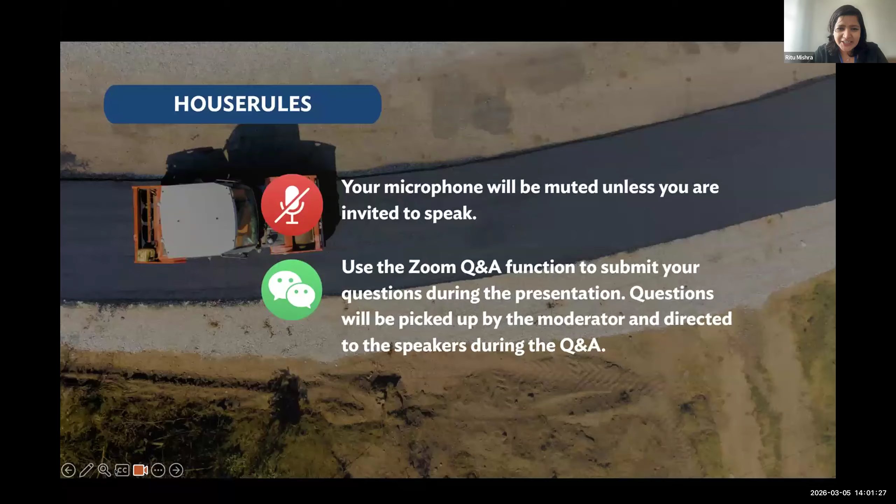But today we turn our attention to a topic with wide relevance across many contexts, which is making low-cost granular roads more resilient. Low-cost granular roads form the backbone of many rural road networks across Asia and the Pacific, and in fact they account for about 35% of roads globally. However, these roads are often very vulnerable to heavy rainfall, flooding, and poor material performance, which can lead to problems such as deformation, erosion, and even washouts.

So in today's Green Roads webinar series, we will be exploring practical lessons from Australia, including mechanical and chemical stabilization techniques, the use of recycled materials, and emerging permeable pavement concepts that can help improve the resilience of these roads. So please stay with us until the end of this session, and we look at more practical and cost-effective solutions for building longer-lasting climate-resilient road networks.

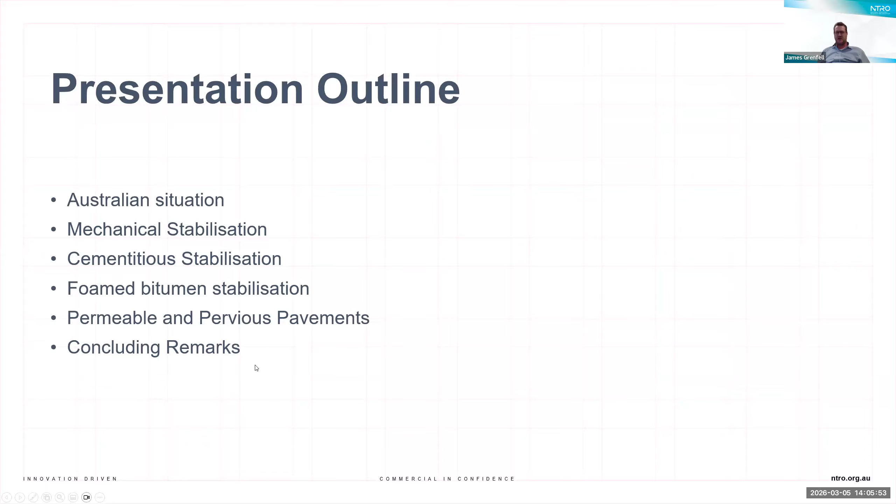Right, so to start off with, I'm going to talk a bit about the Australian situation. I don't know how well everybody knows Australia. Just to put it in, I guess, sized perspective, the land mass of Australia is around 90% of mainland USA, or the main part of USA, not including Alaska.

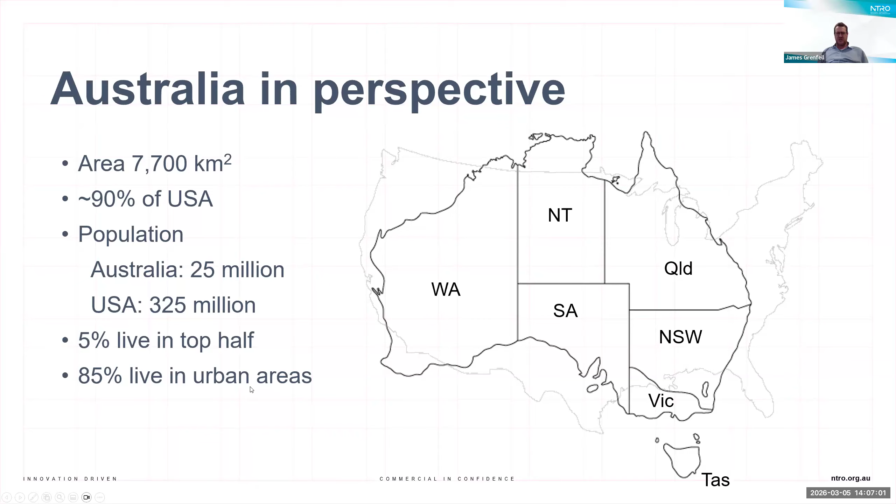Whereas here we've got a population of just over 25 million compared to, say, the USA with 325 million people. There's a big disparity in Australia between where people live. Only 5% of the population lives in the top half of the country, and around 85% of the population live in urban areas. So there's a large amount of land mass with very few people living in it, which presents a lot of issues in terms of building and managing a road network.

Most of the population is around the eastern seaboard. Brisbane, Sydney, Canberra, Melbourne, Adelaide are all roughly around the eastern or southeastern seaboard, and that's where most of the population is. Large proportions of the centre of Australia have either no road network or nobody living in them.

Putting things into context with the USA - and that's not necessarily very helpful for everybody in this session, but I think most people have a bit of an appreciation for what the USA is like - the road network in Australia is around about 810,000 kilometers these days, which is quite small in comparison to the USA.

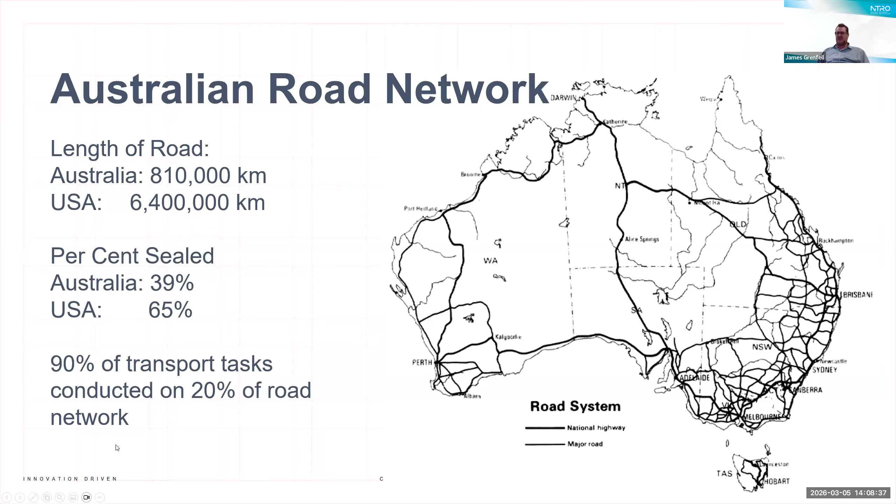The other thing is that we have a relatively small amount of the network that's actually sealed pavement. I think around 90% of the pavements in Australia are granular pavements, either with or without sprayed seal. So only around 10% of the network is full depth bound pavements, be that asphalt or concrete. The other interesting thing is around 90% of the transport tasks are undertaken on only 20% of the network, so big disparities in terms of traffic levels as well.

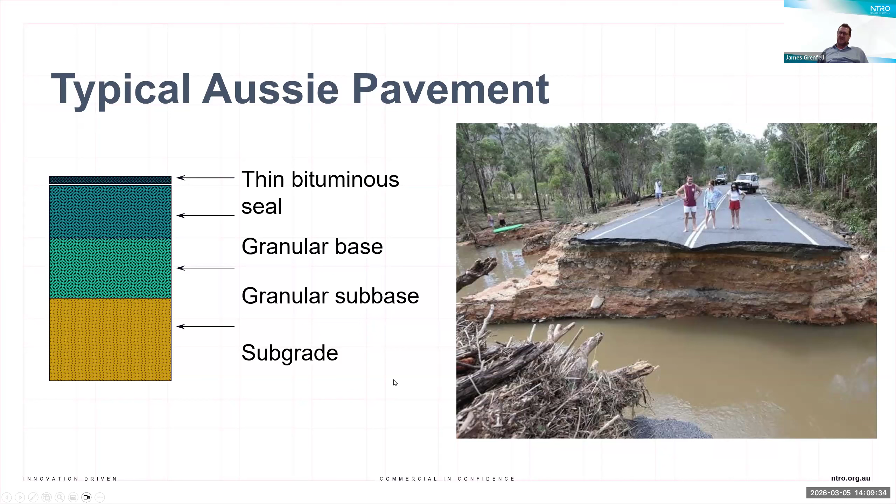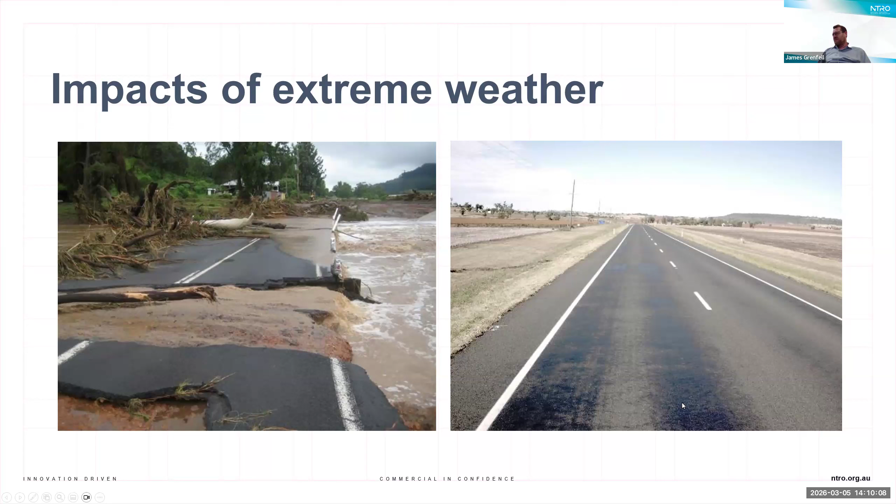So these are some of the issues that we're facing in Australia, obviously dealing a lot with instances of very heavy rainfall, flooding events, but also Australia is a very hot country. We're subjected to extreme high temperatures, and again, that is particularly troubling for the sprayed seal network in terms of heating up binder, causing binder softening, flushing of binders, and reduction in the quality of the sprayed seal road network.

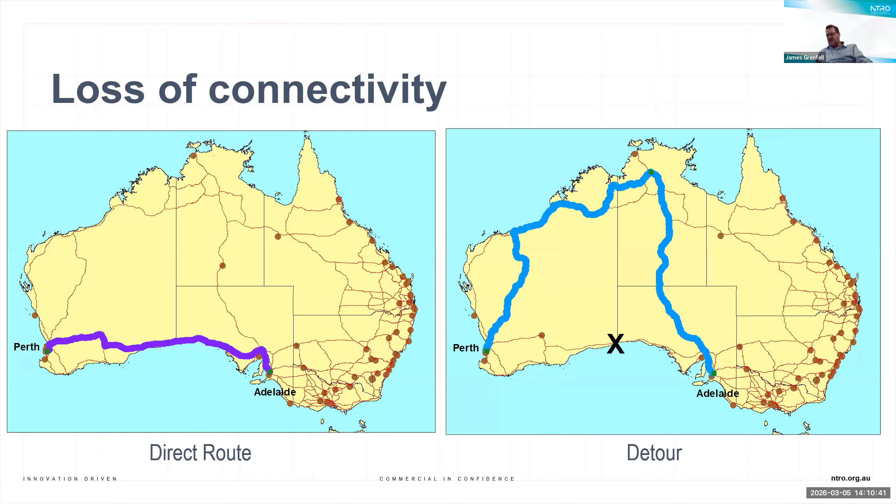As mentioned before, certain parts of the country have very little connectivity. For example, there's only one major route between Adelaide and Perth. If we're to lose that direct route, you can now see that you have to drive all the way up to almost Darwin in the Northern Territory, across the top of WA, and all the way down through WA to get to Perth. So we're very precariously balanced in terms of the risks of losing connectivity and what that means to our road network.

We're affected by weather cycles, and in Australia we go through this continual cycle between El Niño and La Niña, where we have much drier, hotter periods and much wetter periods that we obviously have to deal with in our network. These weather periods typically last somewhere in the region of 5 to 10 years, where we'll have 5 or 10 years of very dry period, followed by 5 or 10 years of very wet period.

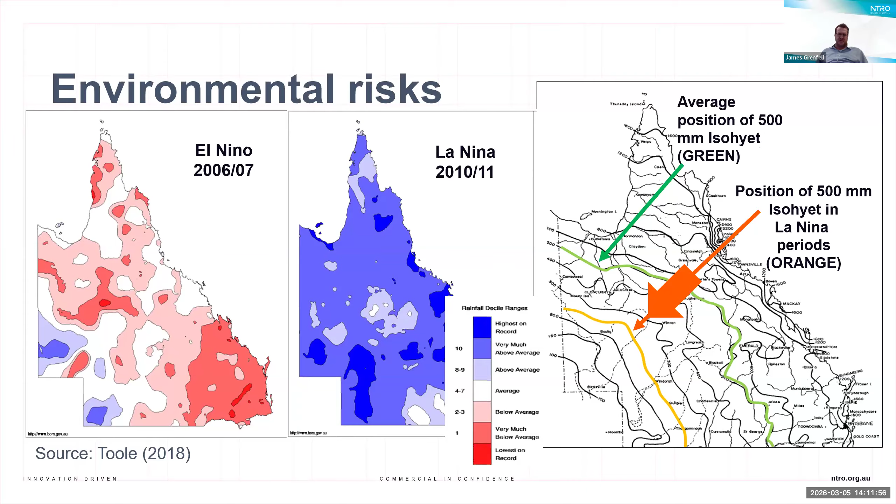And obviously that's going to have significant effects on the road network and the operation of the road network. The higher temperatures affect bituminous surfacings, asphalt, etc., while very wet conditions really affect the unbound granular materials below, and especially the unsealed road network.

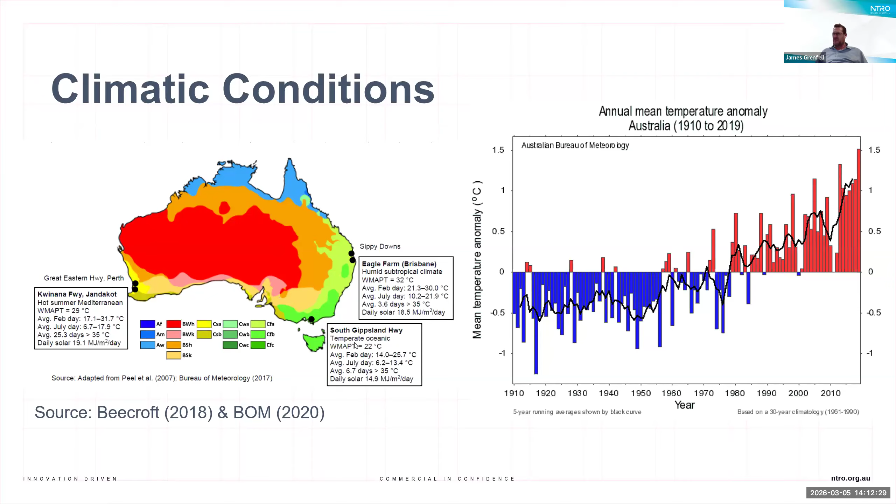Again, generally Australia is very hot, and mean temperatures are only obviously rising over time, significantly higher in the last 30 or 40 years, where average temperatures are continuing to go up, and understanding how to manage a network under those conditions is obviously a continuing problem.

The first main topic area I'm going to talk about is mechanical stabilization, or essentially how we can get the best out of our granular materials. Some of this has come off the back of a number of guidance documents that we've produced over the years, one of them being a course that we've run for probably the last 30, 40 years, which is the Best Practice Guide to Unsealed Road Network.

As I mentioned, there's probably still 50 to 60% of the Australian road network that is unsealed granular pavement. So it has no sprayed seal, no asphalt surfacing, nothing protecting the granular network.

The granular materials can be very susceptible to changes in climate conditions. In very dry conditions, they become dusty and could be subject to loss of material, or depending on the materials in question, may be subject to corrugations. But if we get very wet conditions, we can have issues with potholing and rutting. The unbound granular materials can become quite unstable under changes in moisture conditions. So these are some of the problems we have to deal with on the unsealed road network.

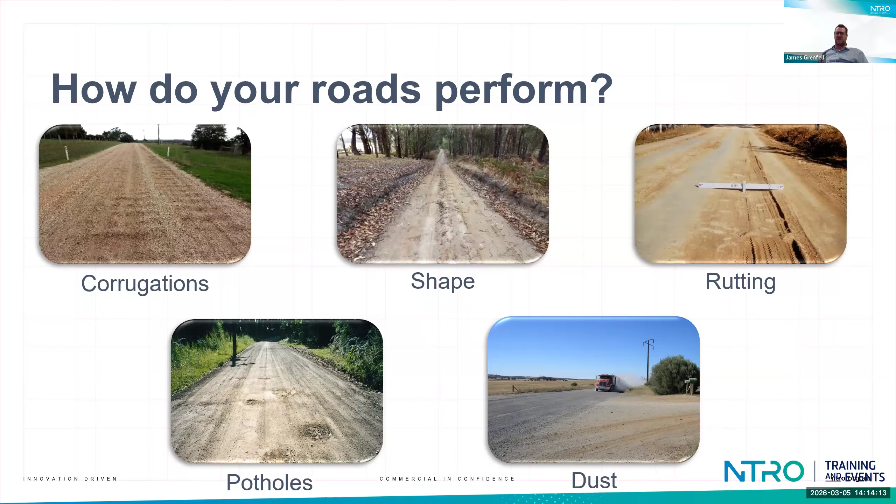I'm not going to go through and tell everybody about unsealed roads or how to manage them, but this document, the Unsealed Roads Best Practice Guide, is free to download through the NTRO website. It contains a lot of information to support people in terms of asset management, design, construction, and operations, and is supported by a number of appendices.

Some of the things I'm going to be talking about is understanding how we can get the best performance out of the unbound granular road network. I don't know how much people love graphs. Hopefully most of us are engineers, and we like to see plenty of graphs in the afternoon, especially after lunch.

This is a relatively simple particle size distribution graph showing the typical types of materials we might be using in our unbound road network. We've got particle size on the x-axis, percentage passing on the y-axis, and we can analyze the materials we're using on our road network by sieving them through a series of ever-decreasing sieve sizes to build up an indication of the gradation of the materials we're dealing with.

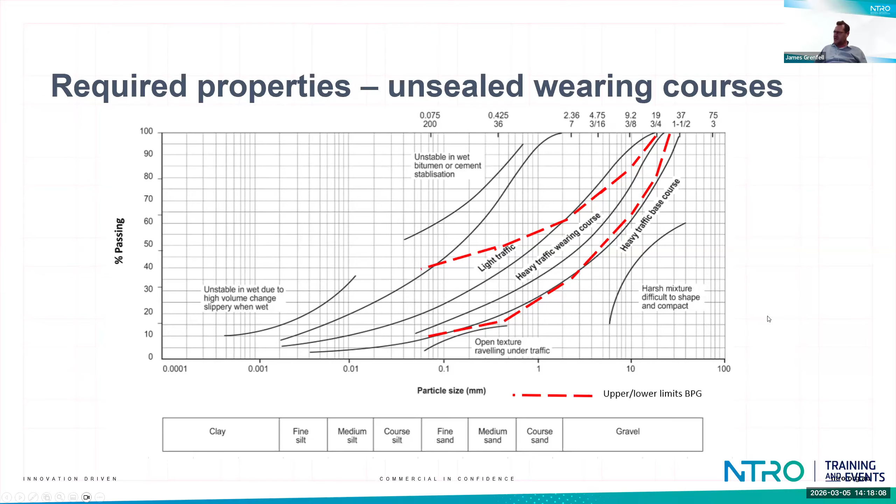Let me introduce you to another exciting graph. This graph, or this system, was developed in South Africa, and it's essentially giving us an indication of how granular materials might perform on unsealed road networks when used in wearing course applications. This time we have a graph with grading coefficient on the x-axis and shrinkage product on the y-axis.

Our shrinkage product is essentially a number that's the linear shrinkage multiplied by the percentage of material passing the 0.425 millimeter sieve, or as an estimate, the plasticity index divided by 2.5, which gives a good indication of the linear shrinkage, again multiplied by that passing sieve value. That gives us the number on the y-axis. Our grading coefficient is an equation made up of different amounts passing different sieve sizes: percentage passing the 26.5 millimeter sieve minus the percentage passing the 2 millimeter sieve, all multiplied by the percentage passing the 4.75 millimeter sieve, divided by 100, which gives us a grading coefficient.

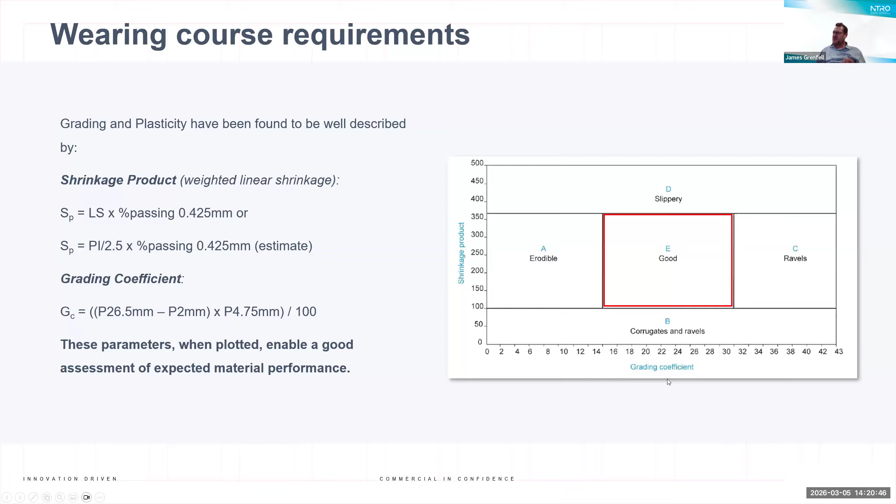So this chart now gives us an extra way to try and define how our materials might be performing in the field.

This piece of work was undertaken to help a local shire council in Australia understand whether they could get better performance out of their available crushed rock sources, to improve the longevity of their unsealed road network.

So automatically, that might make you think some of these materials have grading deficiencies, and they might then be at risk of poor performance, as shown in that other chart.

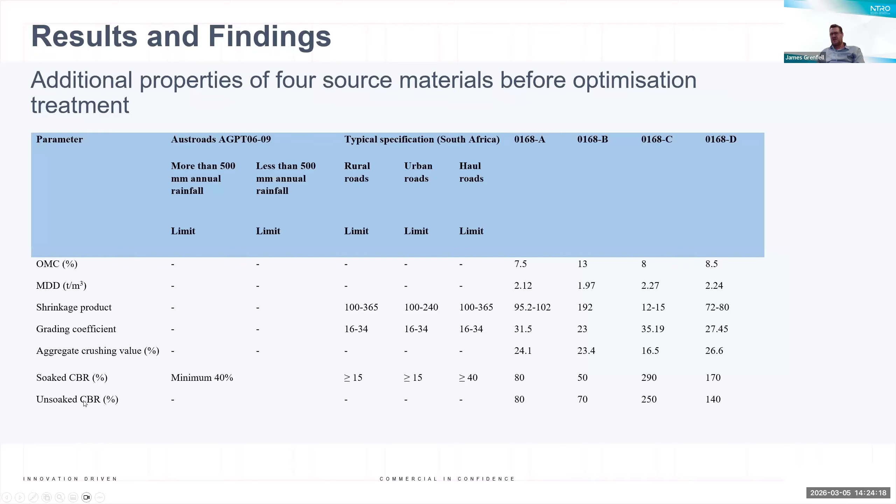Not going to touch on this too much, but essentially this is just a table characterizing the different materials in terms of their OMC, maximum dry density, shrinkage product, grading coefficient, etc, and looking at their soaked and unsoaked CBR.

What could we do in terms of improving the gradations? So this is now looking at some of those materials and blending them to improve their gradation, getting them to fit much better within the grading envelope.

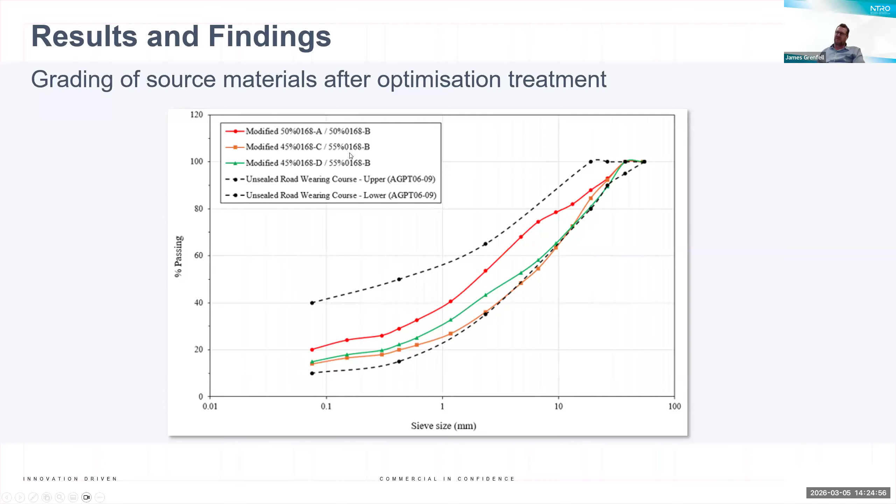And again, just checking what that might mean in terms of their performance, it's now giving us a bit of an understanding that we're able to improve how they're likely to perform.

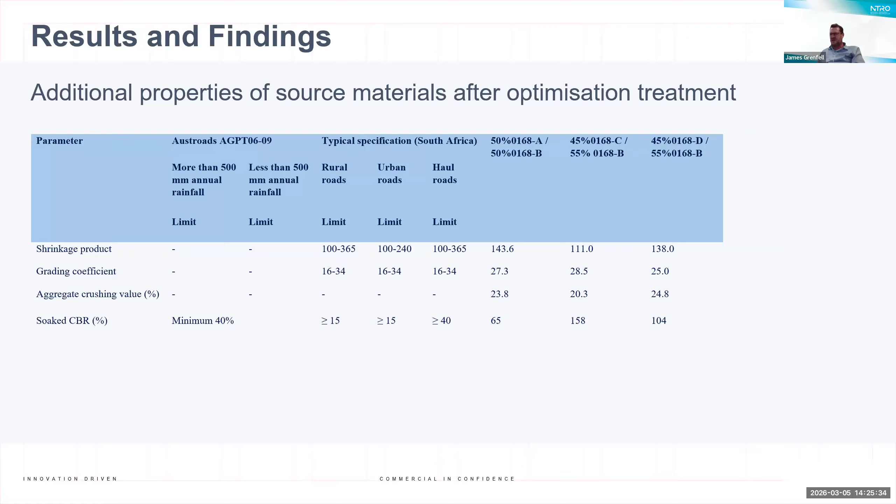This study stops at the desktop stage. There's a next step we would have liked to take with that, which I'm just going to show you as part of a different project.

So again, this time we were working with another local government entity within Australia. In this case, they had a problem recycled crushed concrete material, a recycled material. They also had a problem with waste glass within that council at the time. We were trying to look at whether we could optimize the performance of the recycled crushed concrete through blending with recycled crushed glass.

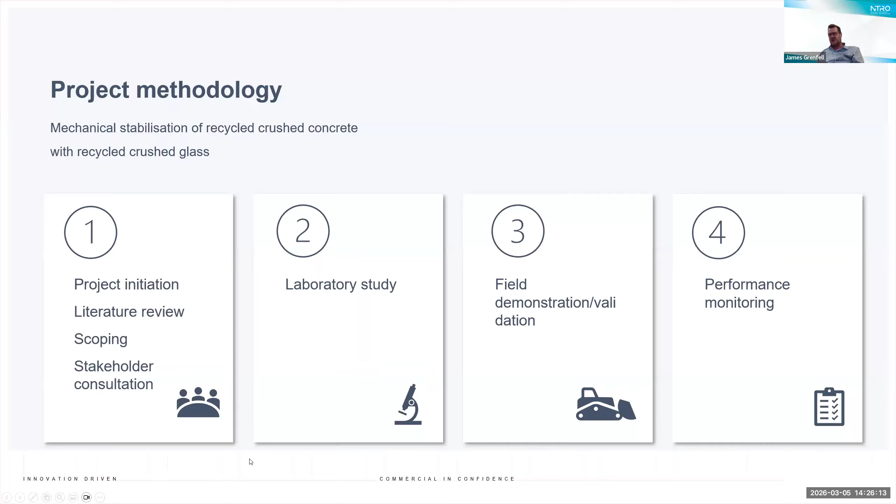So this is the crushed concrete material. It was quite dry and bony, with some quite large particles within it. It was what was called a dense graded base, or dense graded subbase material, with 20 millimeter aggregate size under New South Wales terminologies.

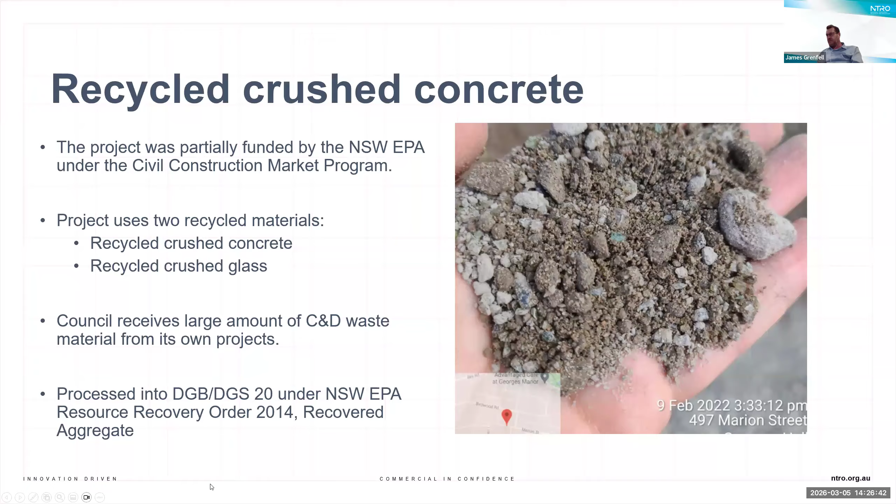The material was actually, you could physically see that there were some deficiencies in the grading. So it had some quite large particles and some gaps within the particle sizes in between.

The other issue is in the last number of years, we've had a lot of issues with waste materials being generated and stockpiled. There was a ban put in place on us exporting our waste to other countries, which is very sensible, but that led to stockpiling and people not knowing how to process the materials to find an end use for them. And so recycled or crushed waste glass was seen as a problem.

There was an opportunity to look at the processing of the waste glass and see whether or not we could use it as a viable product within road construction, and especially for improving the performance of some of the granular materials.

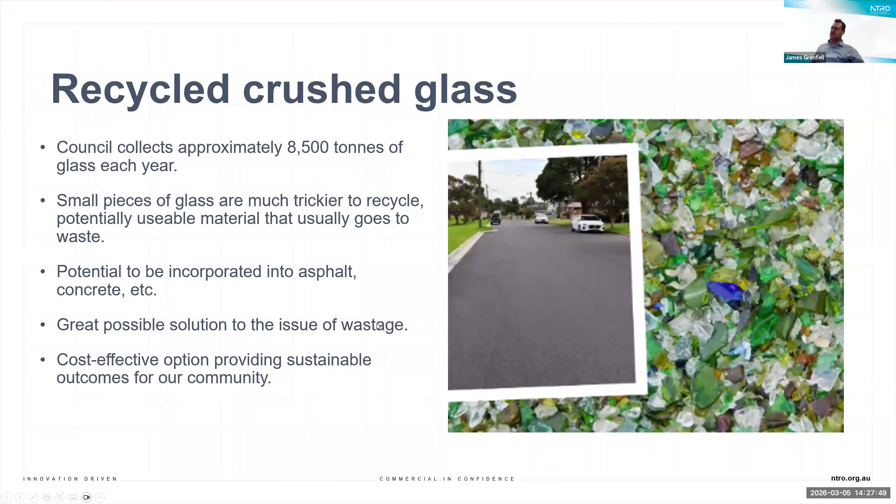So in this case, again, a grading curve - the 100% crushed concrete, you can see, has quite a poor gradation, is quite coarse, sat at the bottom end of our grading envelope. But by blending with either 30% or 40% recycled crushed glass, we can now improve its gradation and get it to sit better within the grading envelope, which means there's an opportunity for improved performance - the potential to get better compaction and, as a function of improved compaction, then improved performance.

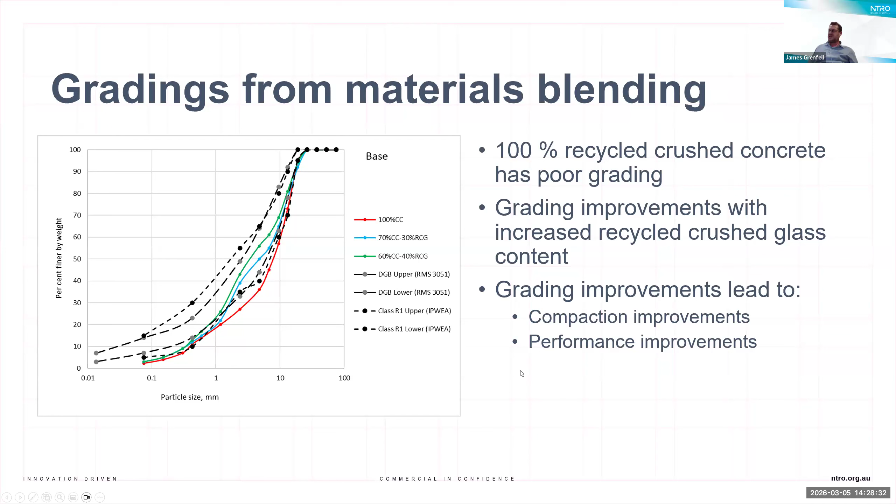We have a device here in the laboratory at NTRO, which we call Austrack, or the extra large wheel tracking device. Basically, we can make up slabs of material that are 700 millimeters long, 500 millimeters wide, up to 300 millimeters deep.

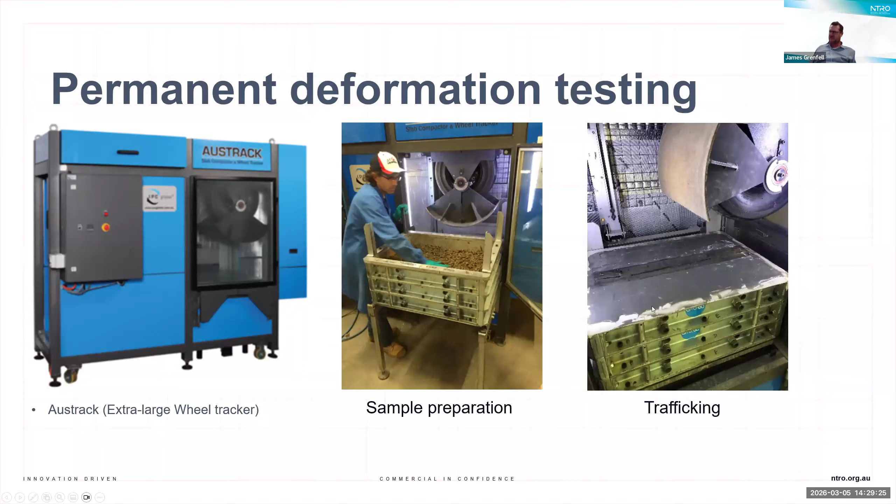We compact in 50 millimeter layers, so 6 layers of 50 millimeters make up a 300 millimeter depth slab. We seal the slab with an epoxy to hold the moisture content constant, and then traffic it with a pneumatic wheel load at 8 kilonewtons for 40,000 passes to understand how it performs in the laboratory. And we've got a lot of indication of how that scales to field performance.

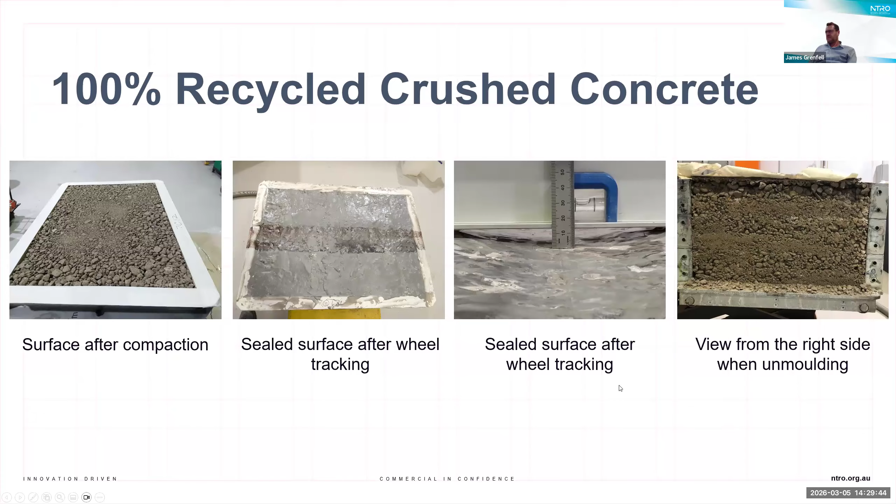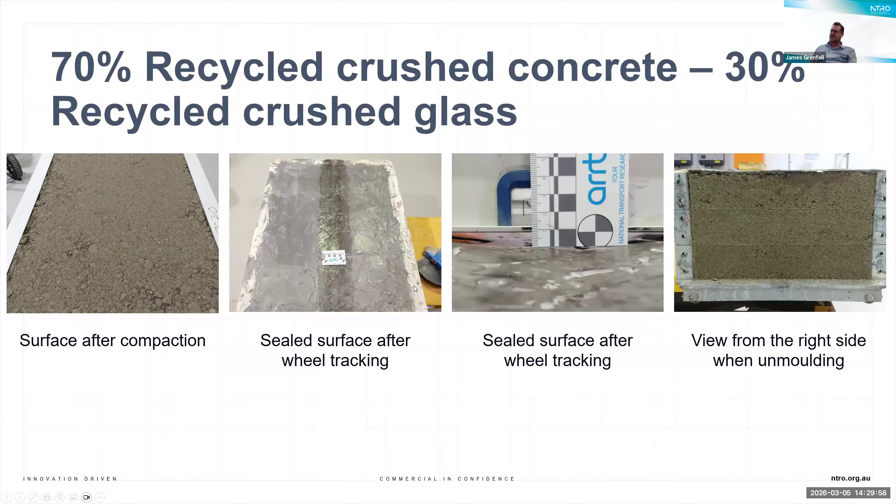And this is an example of the 70% recycled crushed concrete, 30% crushed glass. Straight away, you should be able to see how much better the gradation, how much tighter the material is, which has obviously then led to improved performance under heavy loading.

Actually, the 100% recycled crushed concrete wasn't that bad in terms of permanent deformation performance under the heavy wheel loading. The test that we undertake goes up to 40,000 cycles. Typically, correlations have shown that if we can get under 14 millimeters of deformation after 40,000 passes, the material is likely to perform well in the field in a sub-base application. So actually, although the recycled concrete didn't look that great, it probably would have performed okay in the field.

But now we can see that we've blended it with recycled crushed glass and we get improved performance. And there's also that additional aspect that we've now mechanically stabilized with a recycled problem material to get better performance. So you can start to see we're going to get some sustainability benefits by doing that.

We then took that to a field trial. One of the things we found is that adding even more glass actually improved the performance. We did some calculations to understand how much available waste glass there was, and determined that probably going to 40% might be too much, and that to undertake a few projects there might not be enough available recycled crushed glass after quite a small period of time.

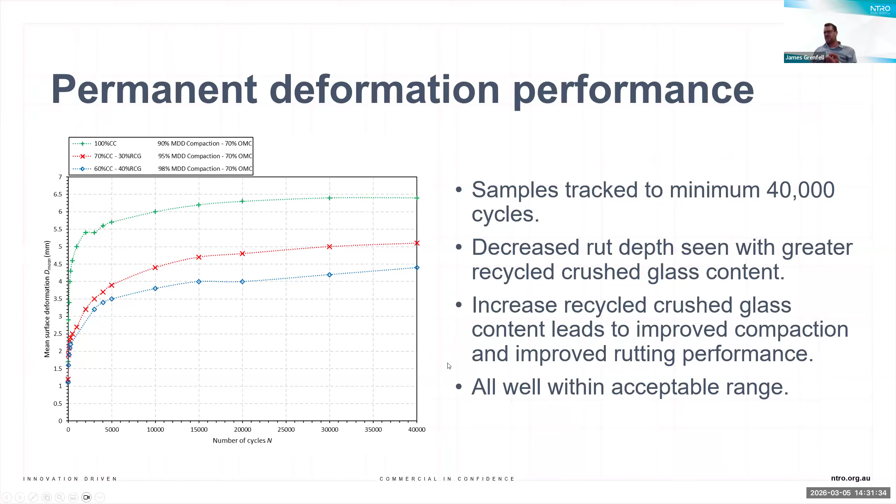Anyway, it did lead us to doing a field trial on a section of road within Sydney. These are just some images from the field trial construction. The job went down fairly well, people were happy with the outcome. We did some ongoing performance measurements, and everything seems to be performing very well.

So this is another excellent outcome and an example of how we can use mechanical stabilization to get improved performance. Essentially, we managed to scale up the blend.

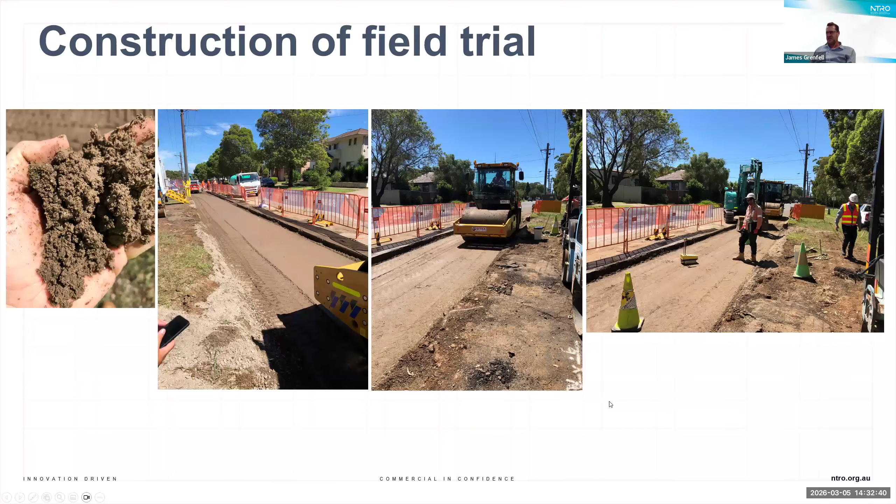The mechanical stabilization took place essentially running the materials through a pug mill and an asphalt plant, blending the recycled crushed concrete with the recycled crushed glass at the right moisture content, delivered to site and compacted as part of this project.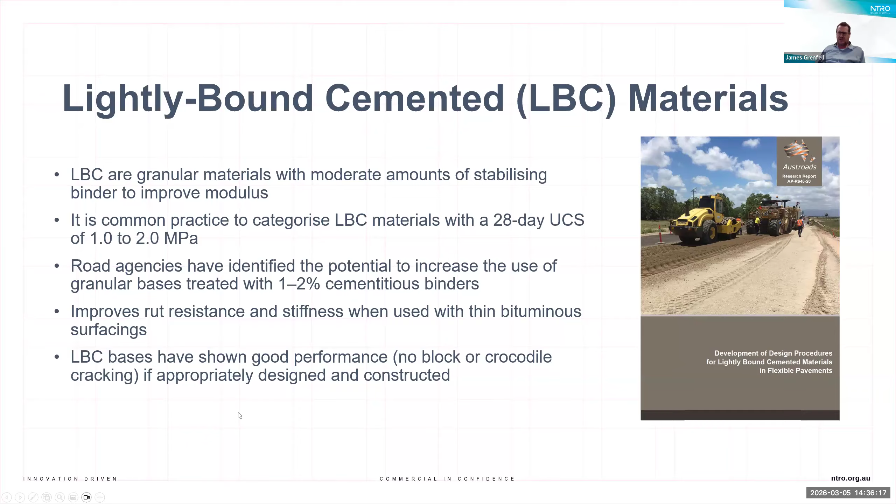So what we're trying to engineer against is this type of issue where we end up with block cracking.

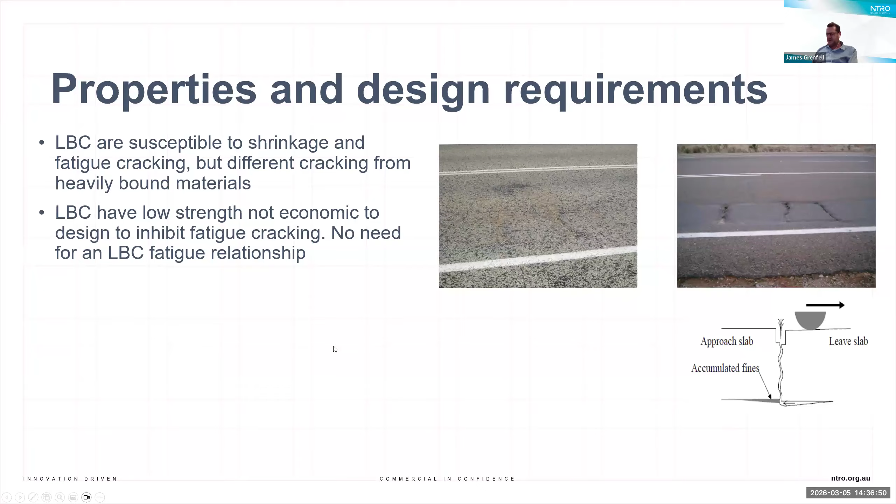These materials have a low strength, so they're not designed to inhibit fatigue cracking. We're essentially designing them as if they have a very limited bound life, and that we're designing for them essentially acting in a modified granular material state throughout their lifetime.

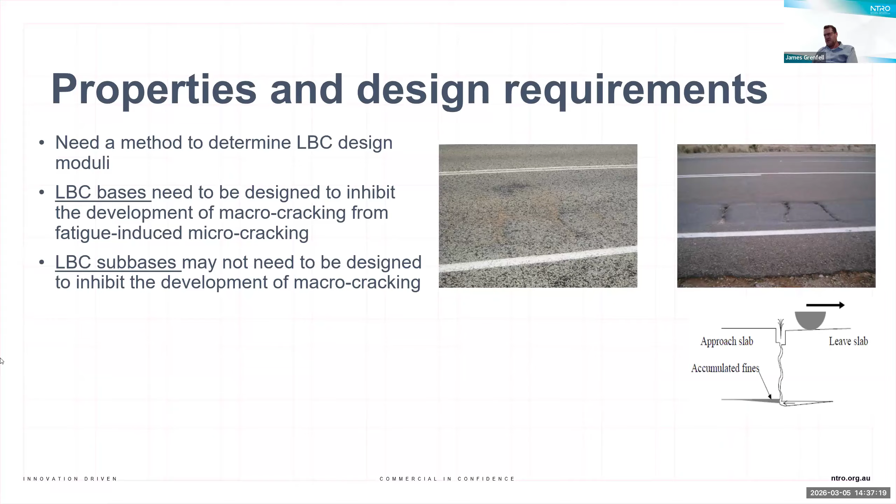As part of this work, it was to develop a lightly bound cemented design methodology. A lot of the work was undertaken to try and characterize the materials and help us determine a design modulus at which these materials could be worked with in real pavement scenarios.

Another aspect to this was to try and understand how and where these materials have performed well and where they perform badly in the field, to understand any guidance around how they should be used. So we looked at a number of different field sections in Queensland, looked at their long-term performance, and were able to correlate where they'd performed well and where they performed badly, which helped to produce some advice around the amount of unbound granular subbase support they should require to perform well.

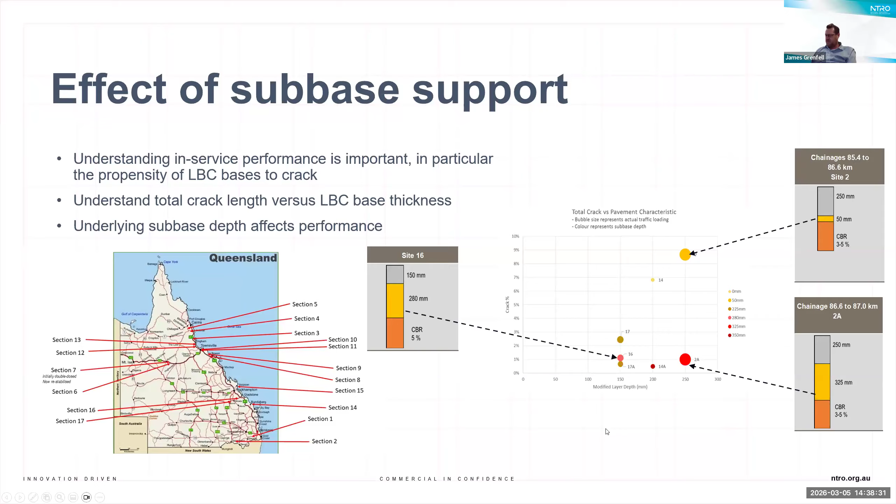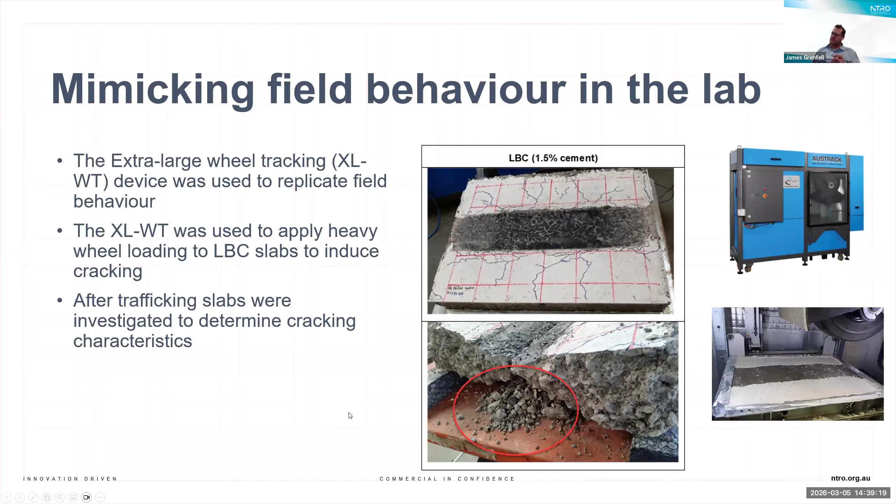And again, obviously, we looked at a number of—you have another less than 5 minutes or so.

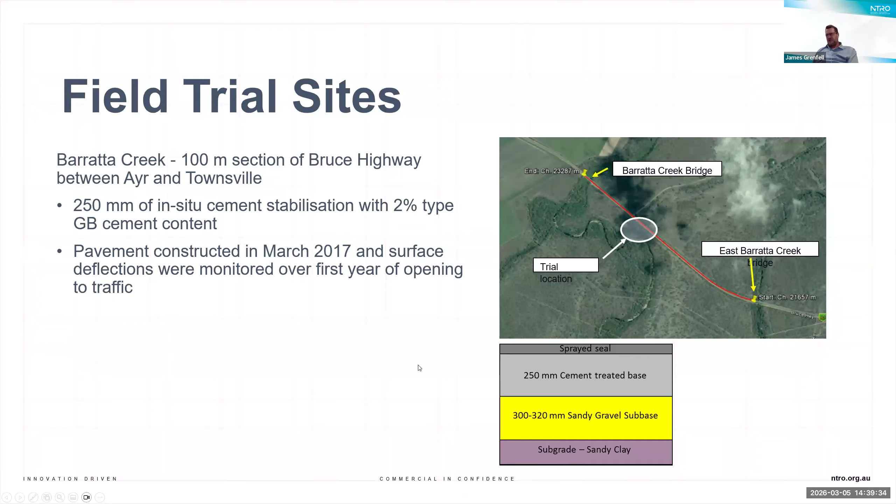Thank you. So we also looked at some field trial sites to help support the performance, to help us determine a presumptive modulus that could then be used in pavement design, and to come up with pavement design advice for designing with lightly bound cemented materials.

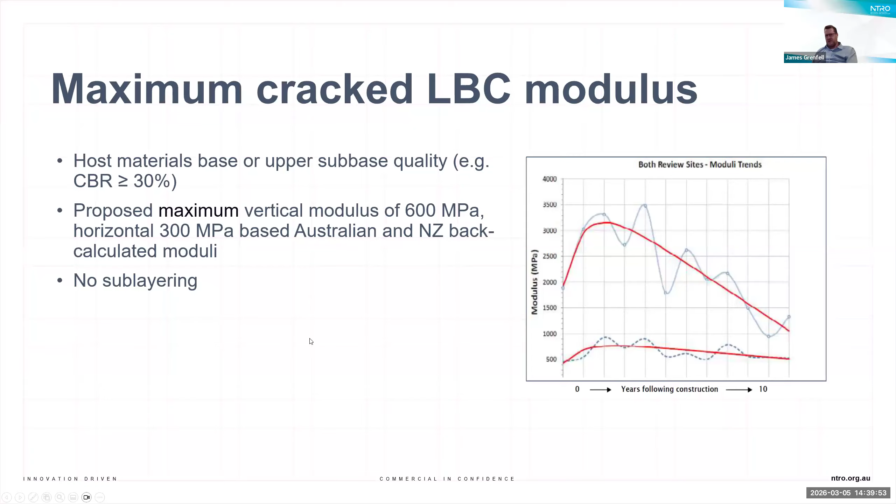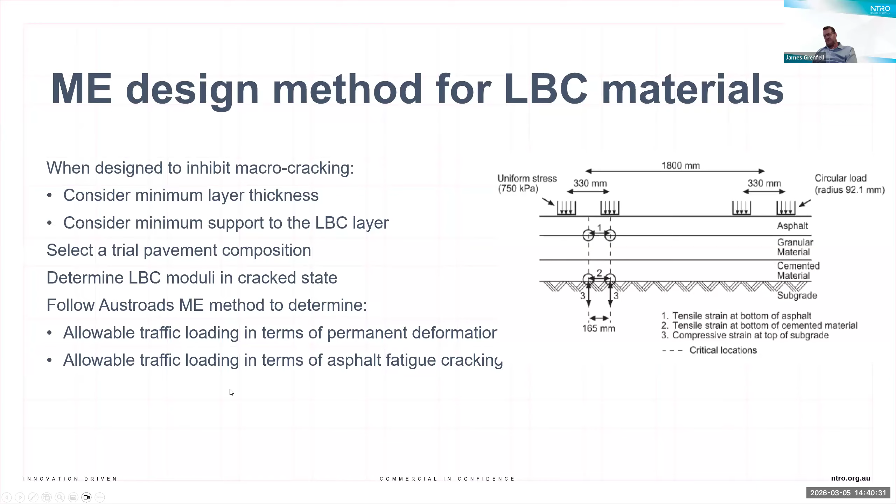So this now feeds into the Austroads Guide to Pavement Technology Part 2, which is the design of pavements. There are some rules around minimum layer thickness and minimum support for that layer based off this research in terms of granular subbase material, and also some advice around selecting presumptive moduli for the lightly bound cemented layers within pavement design.

This has now led to a design method with the potential to get some thickness reductions within field construction, which is now being utilised within Queensland Department of Transport and Main Roads, and they're actually working towards publishing an update of their own methodologies to produce a pavement design supplement to incorporate this design method into their standard practice.

We're also looking at further widening some of this research to look at the option of taking some of the blending of recycled materials to be used as host materials for these stabilization techniques. We're also working with Transport and Main Roads to look at broadening the understanding of how stabilization techniques work with different recycled host materials.

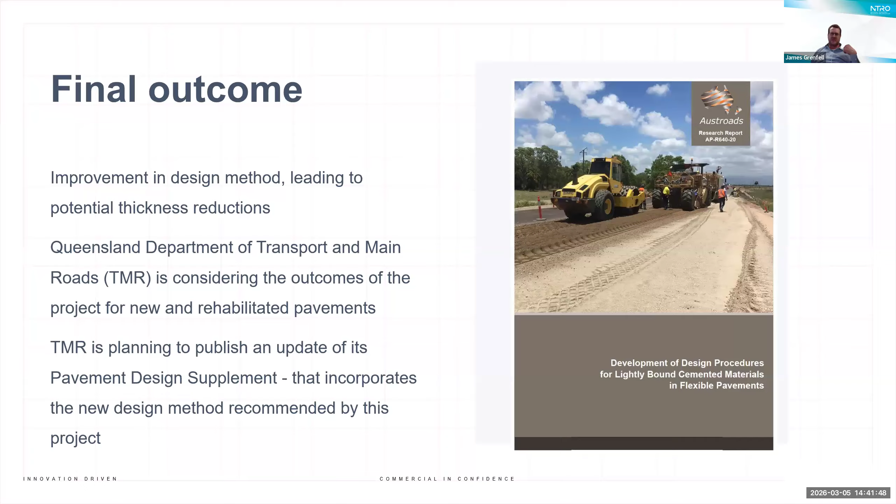So that we can adjust host material characteristics to get better long-term performance - not just in their unbound state, but also if we cement stabilize, or now the next one, foam bitumen stabilize. I don't know how much people know about foam bitumen stabilization, so it's a slightly different technique whereby you're foaming bitumen and also blending in a secondary binder to make a material that looks almost like a hybrid between a concrete and an asphalt.

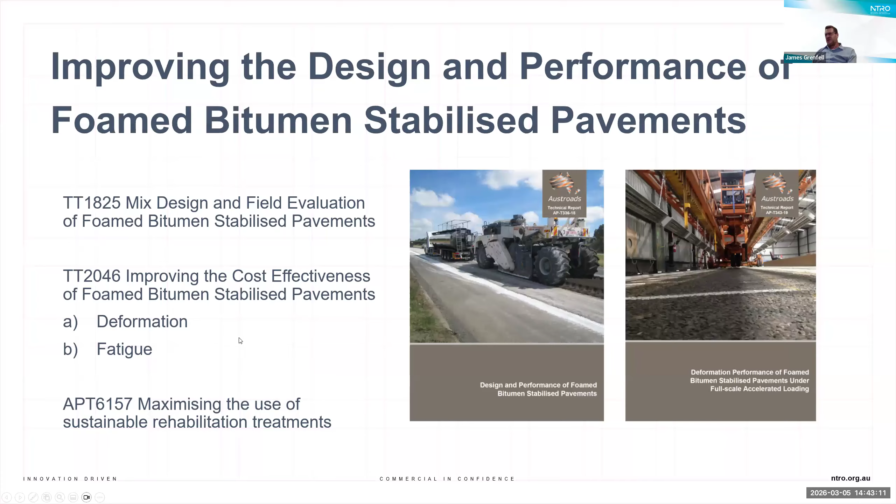It's stiffer generally than asphalt materials, but also has some flexibility due to the bitumen content that gives it improved fatigue performance over cementitious or concrete materials. So we undertook a lot of work with Austroads to develop guidance and help understand the design and performance of foam bitumen stabilized pavements. There was a lot of work undertaken under our accelerated loading facility to look at the permanent deformation performance and fatigue performance of these materials under accelerated loading.

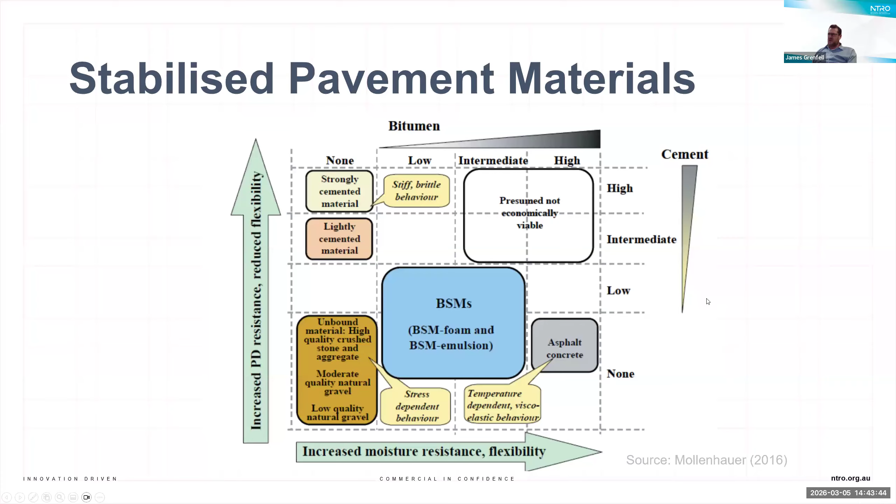So what we're typically doing is passing water through hot bitumen, which foams up the volume by maybe 20 or 30 times for a relatively short period of time. But during that time, the materials are mixed together and the foam bitumen coats fairly well with cold granular in situ host materials, forming lots of little spot welds.

We're also adding in a secondary binder, typically in Australia, hydrated lime. The materials are compacted at somewhere between 70 and 85% of optimum moisture content, and they will continue to cure with time to form a very stiff, moisture resilient and also permanent deformation resilient pavement structure.

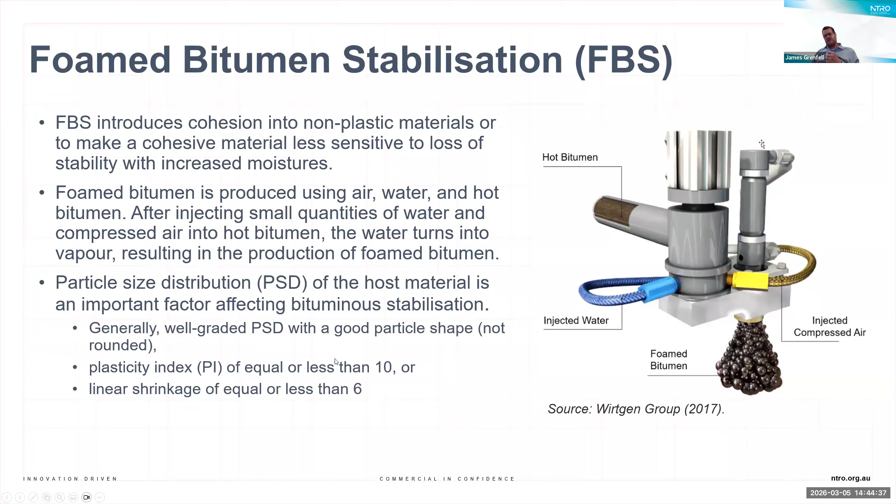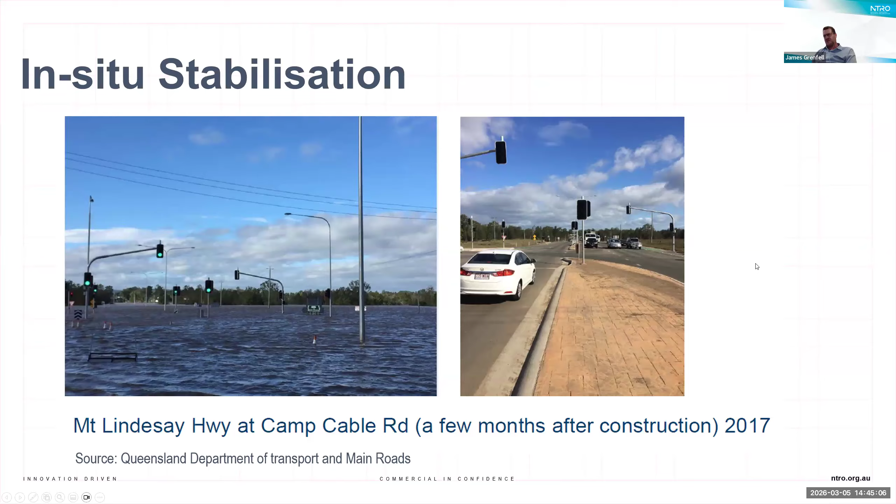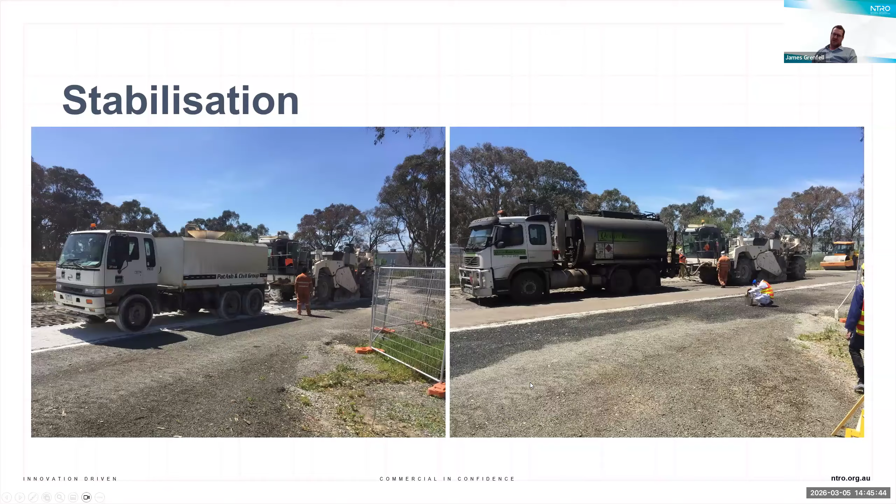So as I said, typically we're adding in hydrated lime in one pass. We have a stabilizing machine or pulverizer to blend the materials together. Second pass with the bitumen, so the bitumen connects up to the pulverizer. The bitumen is foamed in the foaming rig, or water's passed through, that's then mixed in the mixing chamber. The materials are then compacted with the heavy roller to form our foam bitumen stabilized pavement, and then we would seal with either a sprayed seal or a thin asphalt surfacing.

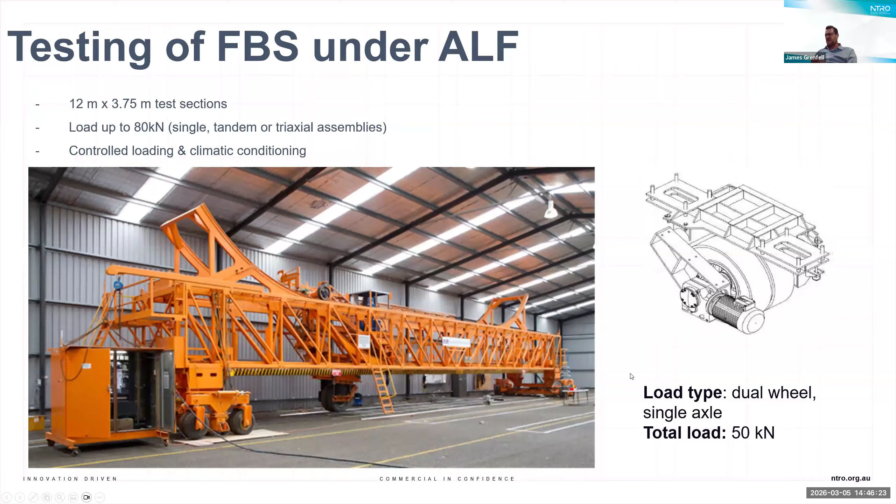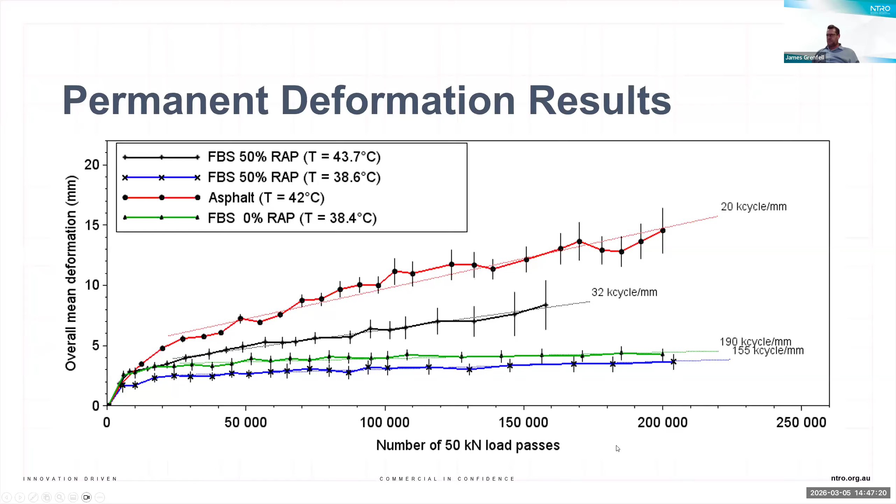There was quite a lot of complex testing to try and understand the fatigue performance of these materials, because there's lots of different things going on at the same time. Over time, the materials continue to cure, so they'll get stiffer with time. As you traffic them, you get a reduction in their modulus.

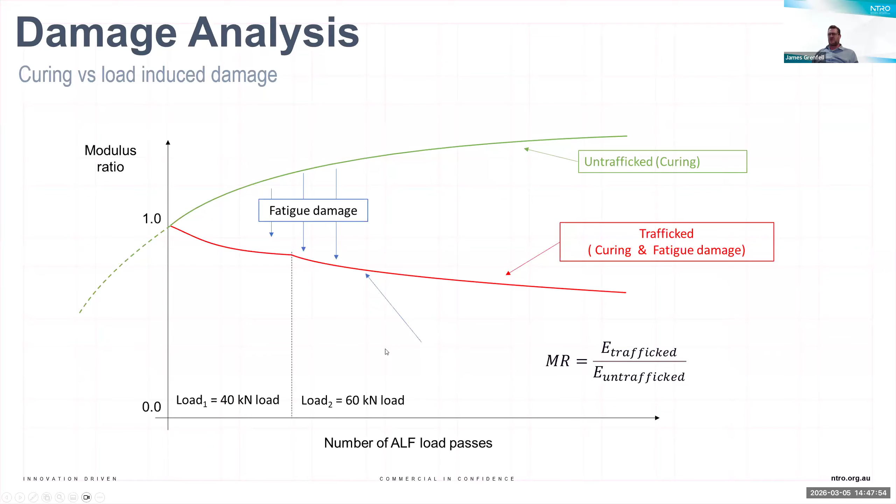This is just a schematic showing what was happening during the ALF pavement testing. We had to increase the load as we didn't get much damage to begin with. And then some further analysis.

This time showing that a blend of host material and RAP material performed very well in terms of fatigue. So over a significant number of wheel passes, we got a 30% drop in, say, fatigue life.

In the case of an 80% cement treated material, slightly worse performance, but still these materials are performing quite well in fatigue as well as performing well in permanent deformation.

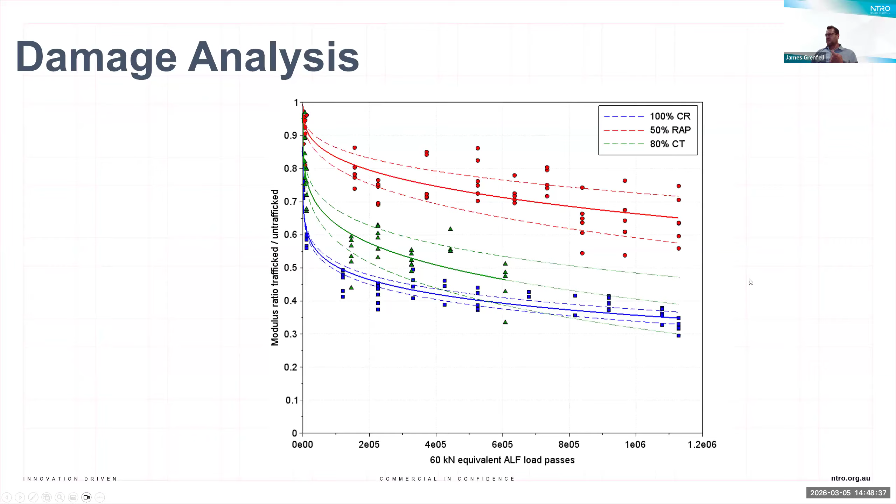So again, foam bitumen stabilization, a very good cost-effective treatment to provide flood resilience and permanent deformation resilience for granular pavements. Right, I've got a couple more slides and then we can go on to some questions.

This one was more of a curiosity. We started to look at permeable and pervious pavements quite a lot for the New Zealand Transport Agency. Obviously, these types of things are what we're seeing all over the world these days, significant flooding events. How can we design our pavement structure to cope with these types of flooding events, but also potentially take advantage of this water that we can collect?

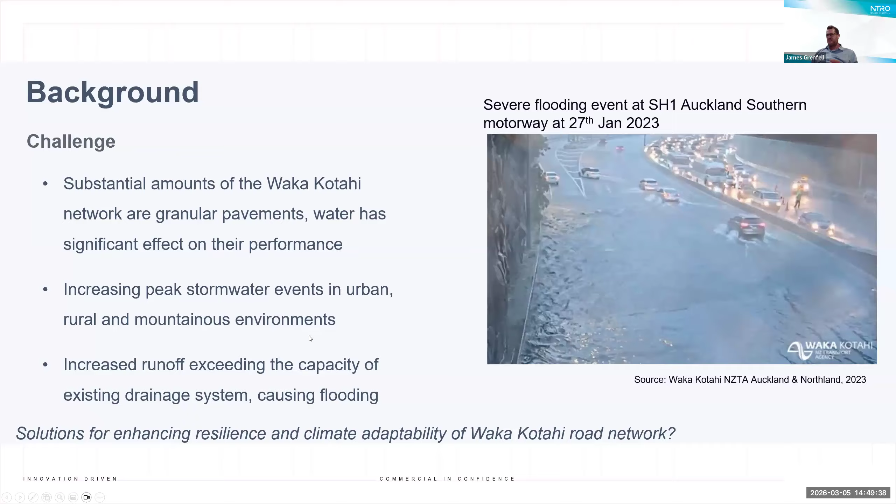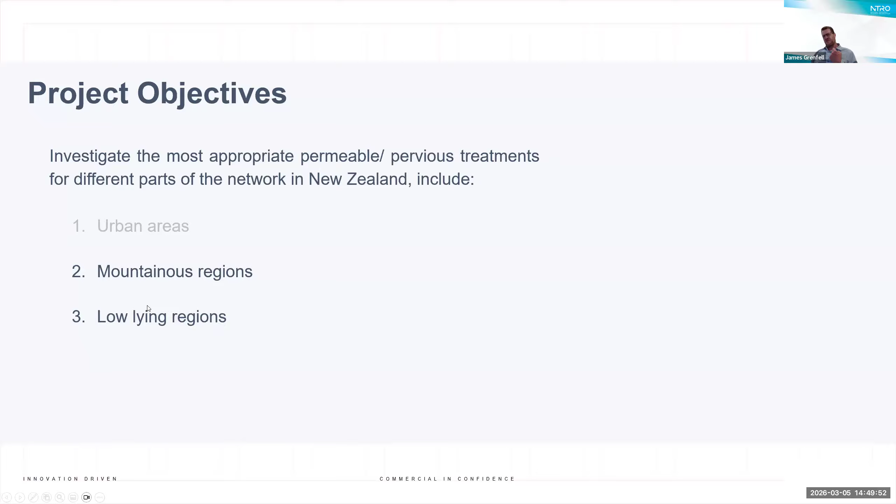Obviously a lot of the focus in this type of research has been for urban areas, but we wanted to understand whether we can find solutions for rural or even mountainous environments, or low-lying regions. I'm not going to talk about the urban areas, but just a few curiosities about what we discovered that could potentially be trialed for mountainous regions or low-lying regions.

So these are some schematics that we would like to take further and either undertake characterization in the laboratory and see whether or not we could design some of these things in the field.

So a typical granular pavement in a mountainous area, obviously we're talking on, say, the side of a hill or the side of a mountain. We might be having significant water runoff during heavy rain events, which could essentially totally inundate the pavement structure and lead to washouts. Could we build a pavement structure that's horizontally permeable to allow water to pass through the subbase material and out to the side of the pavement without causing the washout?

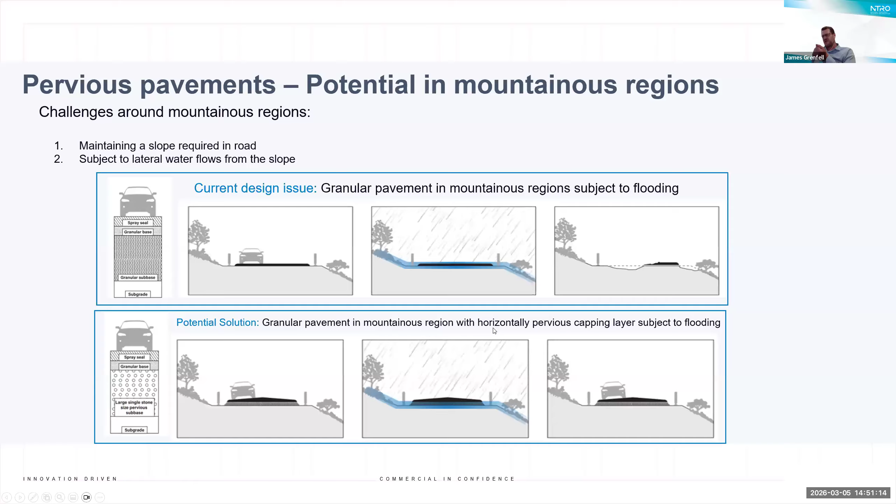So these are some of the theoretical structures that we would like to take to the next level of research. Obviously there are opportunities if we had systems with potentially single-size pervious subbase materials, it would allow us to get water to run under the pavement structure without actually destroying the pavement structure.

And again, in a similar state in low-lying regions, if we can raise the pavement up a bit with horizontally pervious subbase materials, there's the opportunity to allow water to pass from one side of the road pavement to the other without causing significant washouts.

So it's kind of looking at the final steps as to what we could do to improve the performance of unbound granular materials to make them more resilient to extreme weather events. So far, we've not managed to secure any further funding to look at this anymore in the laboratory or even lead us to field trials, but this is hopefully something that we'll be able to do in the future.

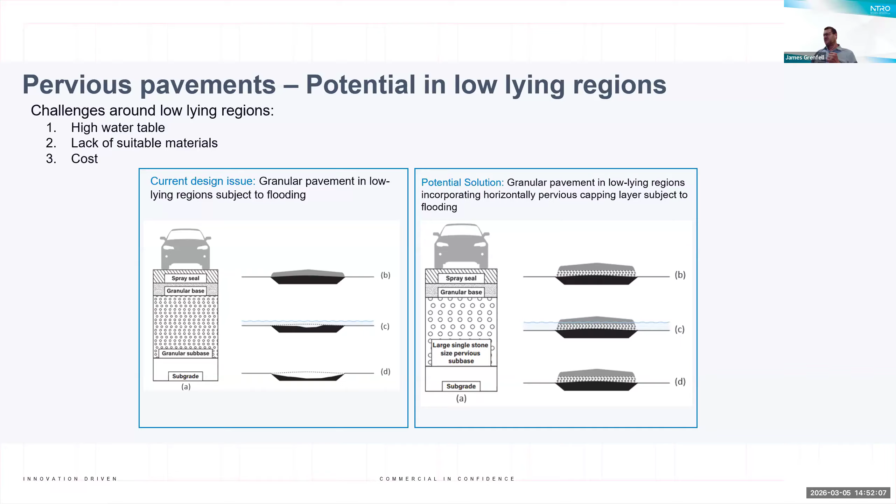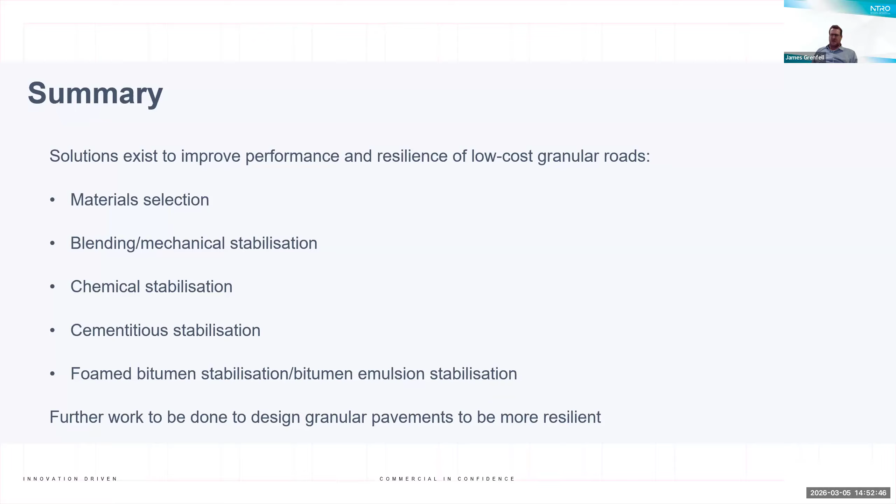So just a few concluding remarks. Obviously, there's a lot of different solutions that exist to provide improved performance and resilience of low-cost granular roads, starting with appropriate material selection, opportunities for blending and mechanical stabilization through looking at the different materials that are available to us. There's options for chemical stabilization, touched upon a couple, cementitious stabilization, foam bitumen stabilization, but there's still obviously further work to be done to see whether we can design our granular pavements to be more resilient.